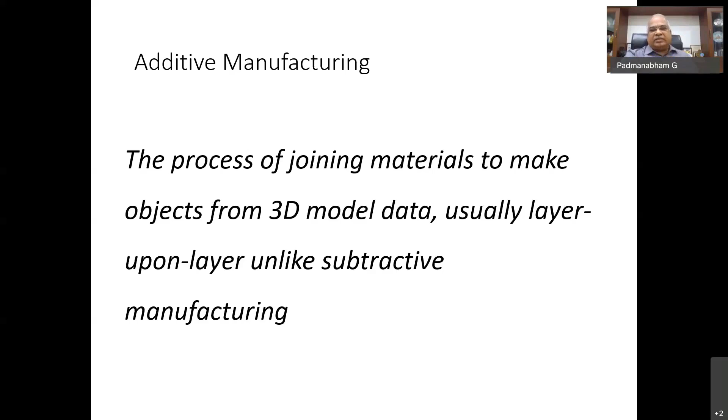So it's the process of joining materials to make objects from 3D model data, usually layer upon layer, unlike subtractive manufacturing. This is the basic definition of additive manufacturing. For any component, you develop a 3D model, slice that geometry into layers, and build each layer by running a heat source or a binder to form the geometry of that particular layer. Each layer is built over the other to get the part. This is the simple principle, which is better appreciated when I show you a video.

Additive manufacturing, why is it so attractive? It generates the product with less waste, less weight, and automatically minimum environmental impact. It is also known as 3D printing, and throughout the talk I will interchangeably use the words additive manufacturing and 3D printing. It's also called solid freeform fabrication, layered manufacturing, or digital manufacturing. It provides an immediate link between what we have created on a computer virtually and the physical object that we build using this technology.

Here is a small video of a very important component we have developed at ARCI. It's called a valve block, and it has multiple inlets and multiple outlets. It has gone through the whole process of design for additive manufacturing, topology optimization, process and support structure design, and the actual building of the component. So all these steps involved in this technique to get an actual usable component, we tried to cover. Instead of me giving an oral explanation, please have a look at this video.

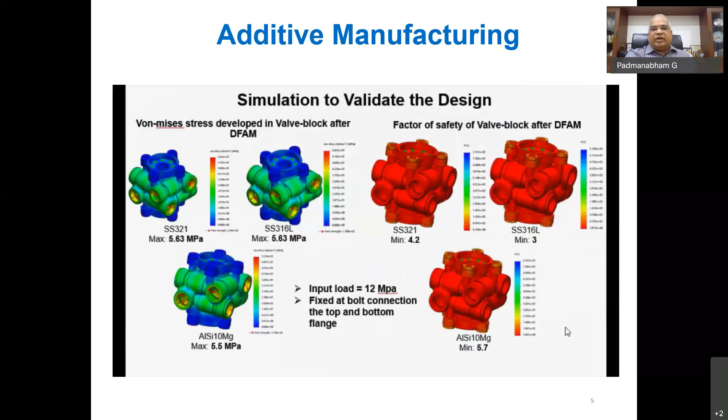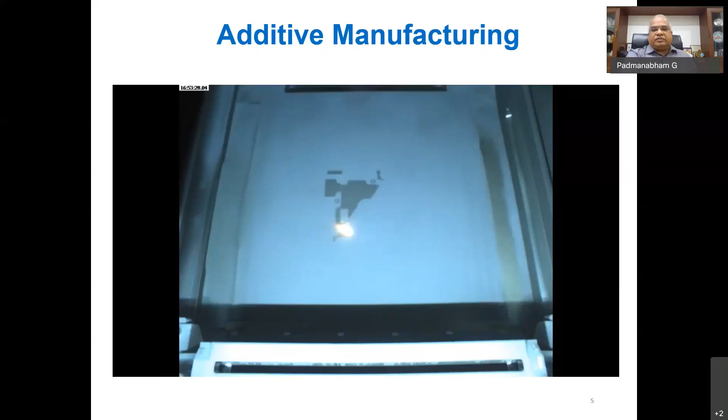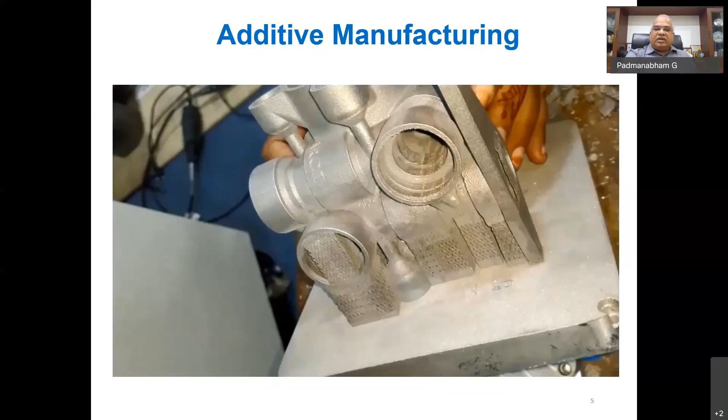After the build is over, using the powder bed technique, the part is taken out from the powder bed, and then all the support structures have to be removed.

What we are trying to show here is how you have to design your support structures so that they are easily removable.

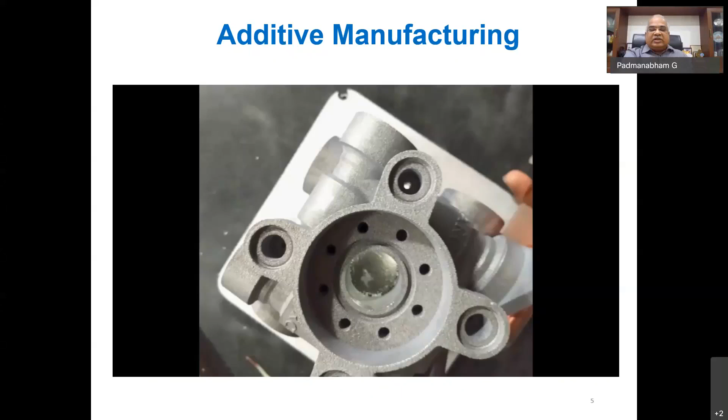So that's the finished part. You can imagine the kind of complex geometry this particular component has got, and how easily we could design as well as do a weight reduction and develop a component in probably one or two iterations itself.

A little historical background: starting from the first plastic-based rapid prototyping machine in '88, and then the first metal AM machine in 1993. Aerospace industry is considered an incubator for additive manufacturing technology due to the ability of direct metal fabrication of titanium components.

Titanium is an expensive material. Subtractively, you will lose a lot of material. So it became a good candidate sector for AM.

Similarly, in the biomedical industry, we need patient-to-patient variation in sizes and geometries of implants and devices, so customization is possible using additive manufacturing. Even for tissue growth and biocompatibility, the porosity required in the part can be tailored, and the surface behavior can be tailored so that there is better osseointegration. That's the reason biomedical industry is one major gainer from using additive manufacturing.

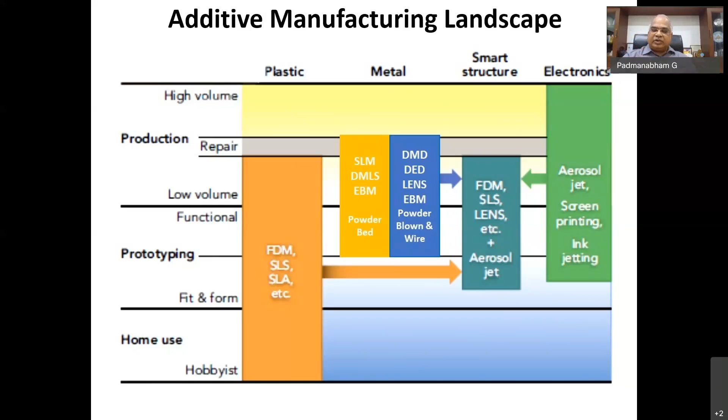So today the landscape is quite wide in terms of the materials that can be handled, the size of production that can be handled, and a large number of processes available to cover both verticals and horizontals, as shown in this chart.

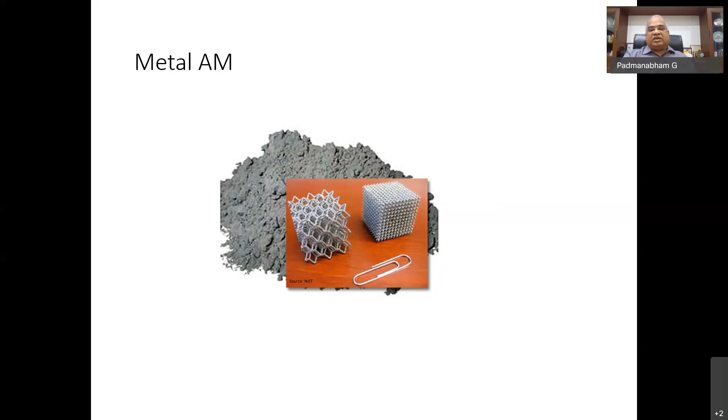And as small as a pin, what I've shown here using metal powders, you can create such very intricate geometries - you can call them mesoporous structures. That is the range that is possible.

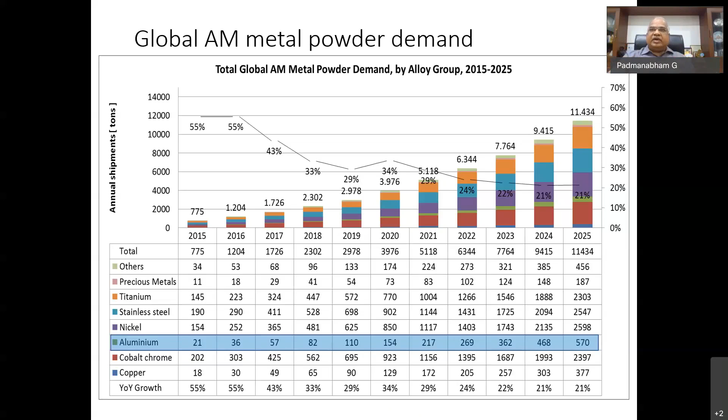So AM is here as a very hot additive manufacturing technology, advanced manufacturing technology. And the whole community of additive manufacturing, or advanced manufacturing, has a very fertile field for research as well as technology development.

Now, a little bit of dissection in terms of where all this potential is coming from. What are the fundamental reasons why this kind of trend we are seeing in the growth of additive manufacturing?

So I'll start from the top: direct translation of design to component. Then customization with no additional tooling. What we cannot subtractively manufacture, some of the complex internal features, we can do with additive manufacturing.

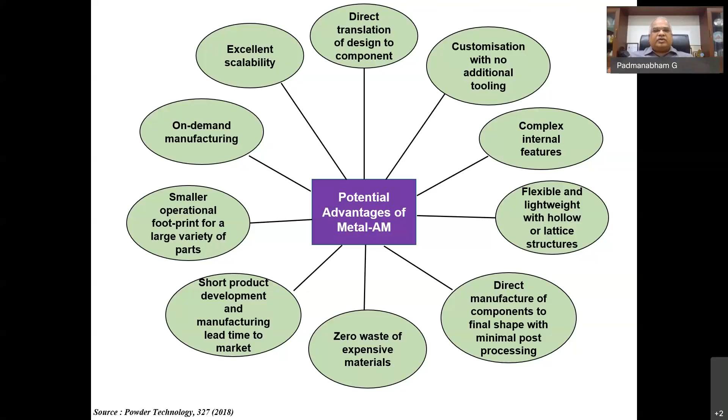So people are making big laser-assisted additive manufacturing systems, like one machine incorporating multiple lasers and building very fast, or combining laser based deposition with other hybrid methods, like very high deposition methods combined with features being deposited by laser. So there are several variants coming up, and even the scalability issues are being addressed now.

Now, having talked in general about the advantages of additive manufacturing as an advanced manufacturing tool, why has the aerospace sector imbibed it or implemented it in a big way? What are those advantages? Like we all know, in aerospace, lightweighting is important. So it is possible with AM.

And we also have to incorporate several components and subsystems in limited space, so since it gives us geometrical freedom, that's where we can draw the advantage from AM. And similarly, you can avoid welded joints and such things and consolidate a number of components into one single assembly. For example, that video I showed you is actually a combination of 6 inlet outlet valves - instead of assembling into one block, it has now been built as a single block. The moment you have no assembly requirements or weld joint requirements, the confidence of designers is higher to take that part.

And then the next part is reduced development time. So, and then this is the market size now.

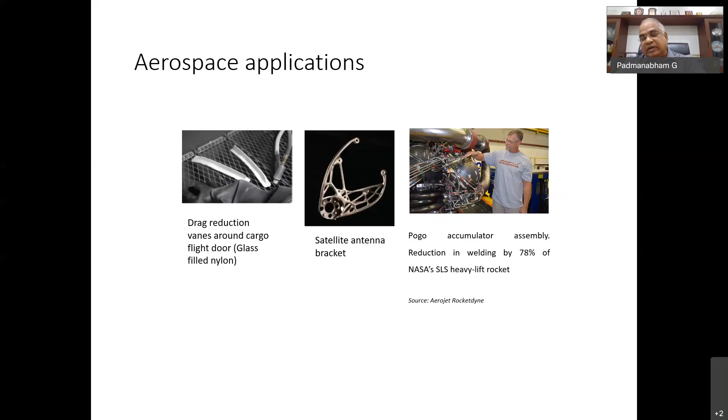In the latest GE engine, it's a demonstrator at this stage, 855 subtractive manufactured parts were reduced to 12 additive parts, reducing the part count. This helps a lot in productivity, and not only productivity, but it showed that a 5% weight reduction is possible, which leads to reduced fuel consumption.

Again, another example of weight reduction - what you make conventionally versus what you can make using additive manufacturing. This structural component uses plasma deposition technology. Even though it's a coarse deposition technology using wire as feedstock and a plasma torch as heat source, productivity has been improved substantially. You almost build a near-net-shape component 50 to 100 times faster than powder bed techniques, but 25% lighter than a forged part.

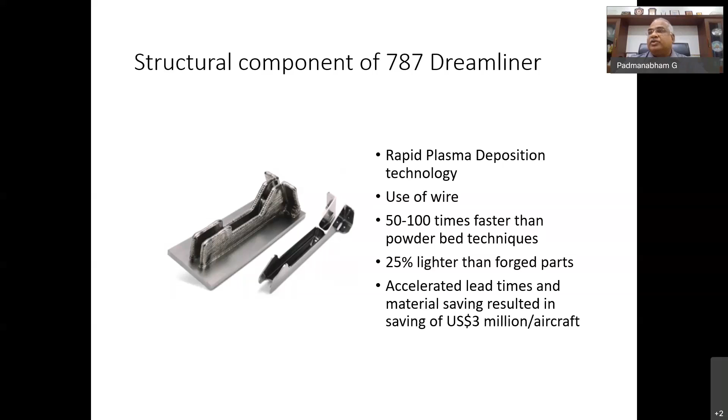Why is it attractive in the biomedical industry? I've mentioned a couple of advantages already - from the geometry point of view, the osteo-integration point of view, and the customization point of view. From the material point of view, some popular materials used in the biomedical industry are cobalt-chrome-moly alloys. With additive manufacturing, it was found that you can achieve 99.9% density and low metal elution compared to as-cast alloys, and it's cheaper also. Low metal elution means less toxicity in the body too.

Similarly, stainless steel 316L is a very popular material. High solidification rates result in avoiding manganese sulfide formation, which otherwise results in chromium depletion and pitting corrosion in these parts - this is avoided when you do additive manufacturing using a laser-based powder bed technique.

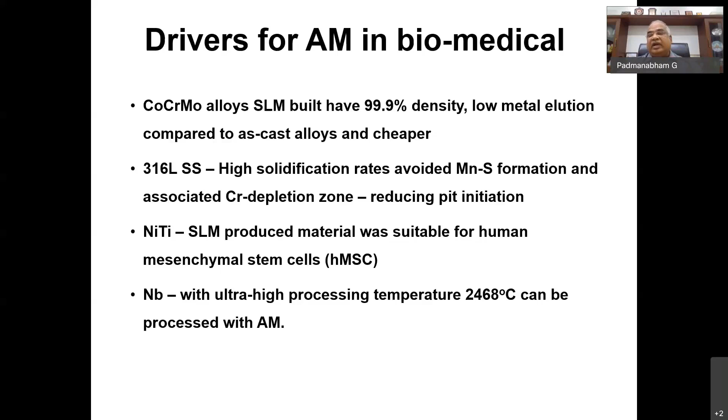And niobium alloys, which are also used, require very high temperatures of processing, which is achievable by additive manufacturing. So these are some of the very popular additively manufactured components and applications in the biomedical industry.

The lower jaw, the lumbar vertebrae, the tubular femoral bone, then the fronto-parietal temporal bone - like this, there are several components already being used in a very customized manner for different patients.

Now the next sector is the automotive sector. The automotive sector, as we know, is a very conservative sector when it comes to incorporating any new manufacturing technology, because the industry is very competitive and the profit margins are very low. So unless it is totally proven in terms of techno-economics, they will not take up any new innovation easily.

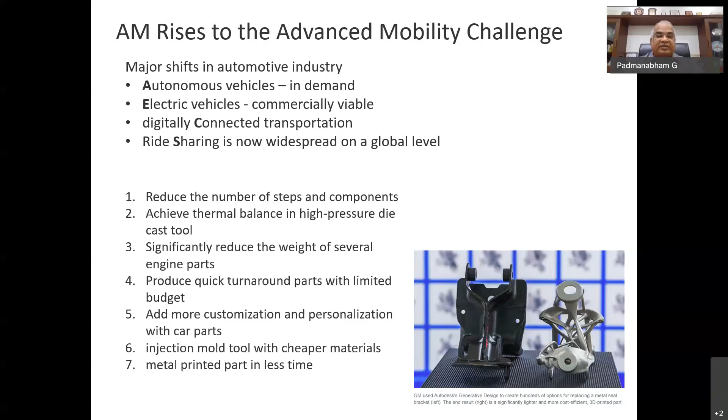So today we can't boast of a big penetration of additive manufacturing into the automotive industry, but it is happening. For example, developments like autonomous vehicles, electric vehicles, and digitally connected transportation are all leading to a need for advanced technologies, and they want to reduce the number of steps and components in manufacturing. Thermal balance, which I mentioned earlier in production techniques like pressure die casting, reduction in weight as in aerospace - here too they need light-weighting, quick turnaround of part development, and customization and personalization. These are all new needs emerging in the automotive sector, leading this industry to look at AM as a possible good technique for them.

But I mentioned that the absorption is not that fast. There are technical reasons as well as business reasons why this is not happening.

For example, the size of the parts that you are able to build as of now is not very big in the case of additive manufacturing. Combination of materials building is still a research stage area. And the major problem is qualification and certification. We don't have established standards that say an AM built part of X material...

...these are the properties that are achievable or to be achieved, then only we can accept it and incorporate it into our design. This kind of standards are still evolving, because the automotive industry produces things in large numbers with Six Sigma kind of quality requirements. Unless the process and technology is robust, they cannot incorporate it.

Similarly, on the business side, you don't have many people with the skills to operate AM technology. Then there are issues of IP protection. Even today it is highly capital intensive. Maybe in future they become cheaper - I'll come to that data also. And today the return on investment doesn't seem very attractive. The technology is evolving so fast that the machine you think is best today may become obsolete in 6 months to a year. And the industry cannot keep revamping their whole production line.

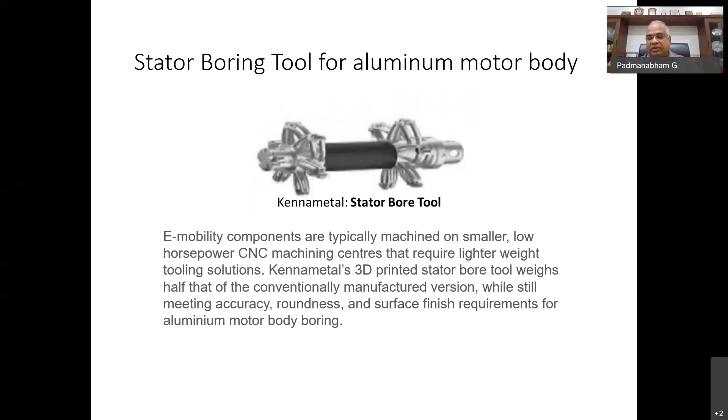For example, I told about tooling - a stator boring tool for an aluminum motor body. This is a Kennametal developed tool, used in e-mobility components that are typically machined on smaller HP CNC centers. By additive manufacturing, this boring tool could be made very lightweighted, because of which very quick adoption of simple machining CNC systems could be done. Meeting the accuracy, roundness, all those things could be managed because the tool is good. And very simple machines were able to manufacture the components.

Now, having talked about the various sectors, the various advantages, the potential, the trends of additive manufacturing, let us get a little technical now in metal additive manufacturing today. What are the different technologies available in the market? What you see here is blue boxes and gray boxes at the bottom. The blue boxes are the actual techniques, and the gray boxes are the companies which produce these machines globally. This is not comprehensive - every day new companies are getting added to this list, almost on a daily basis.

So we have the major categorization in terms of powder bed fusion, or sintering or binding method, as the first vertical, and direct metal deposition as the second vertical. Then the solid state methods of ultrasonic additive manufacturing, liquid metal printing, cold spray deposition are the other three verticals. It is difficult to get into all these methodologies and explain in a one hour talk. Possibly during the 1 week FDP program, you'll be hearing talks on each of these techniques from different expert speakers in the next 1 week. What I will cover today is some popular techniques which we also at ARCI have hands-on experience with.

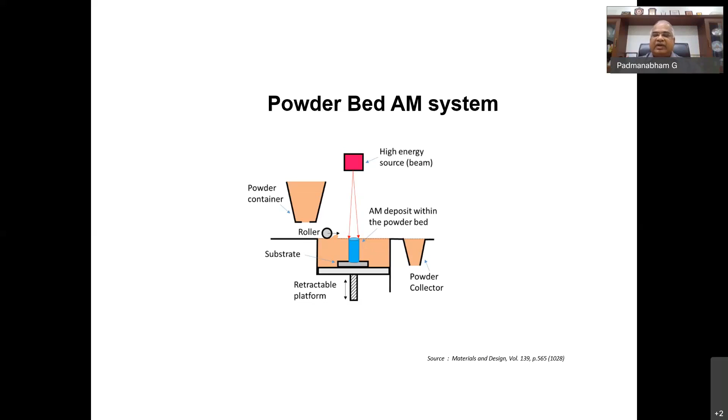So I will talk of the powder bed AM system. You have a bed of powder on which a laser beam or an electron beam, as heat source, is scanned in the pattern that you program. Wherever the laser beam scans the bed, that portion gets melted and solidified. After that layer, you lower the platform or the bed by about 50 to 60 microns, spread another layer of powder, again scan the laser beam, melt and solidify. Like this, the process continues layer after layer, and at the end you have the part you are looking for. This is called the powder bed additive manufacturing technique.

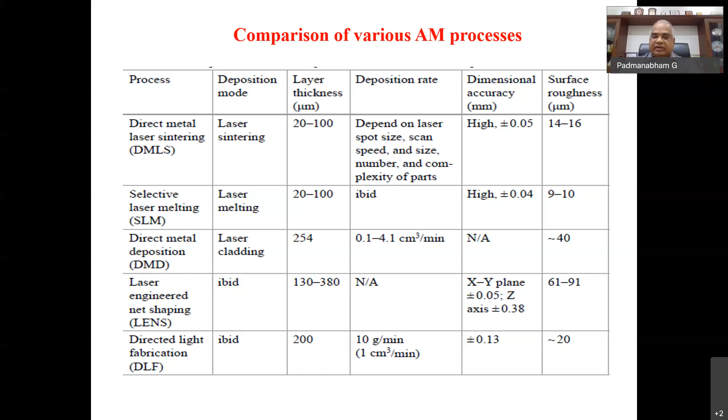Then you have electron beam as a heat source. How is it different from laser beam as a heat source? Today we have machines which can give up to 6 kilowatts of energy. The beam scanning is not done with optical scanners as in the case of laser, but with magnetic systems, giving extremely fast beam translation without any moving parts. So you can imagine the robustness of the machine and the zero maintenance requirements of the scanning systems.

The processing is done in vacuum, because unless it is vacuum, the electron beams get scattered or diverged. The bed that you are melting using the electron beam is also kept at a higher temperature, for better coupling of the beam. The electron beam is first scanned on the bed to form a cake, and then the melting scan happens. Because of this, the bed is maintained at 650 degrees centigrade, and once you have a higher bed temperature, the thermal gradients that the melting and solidification layer experiences will be less, resulting in less residual stresses.

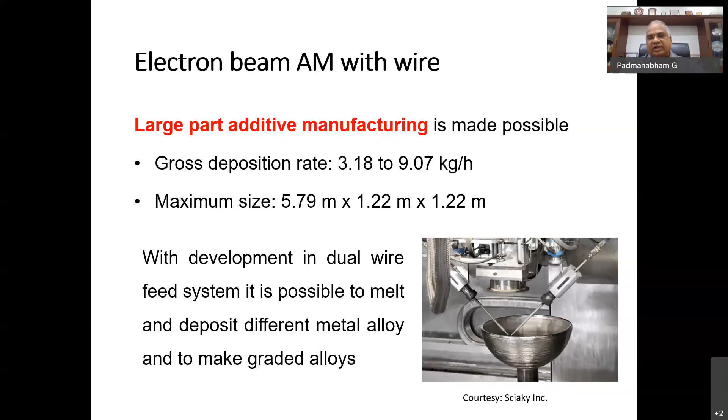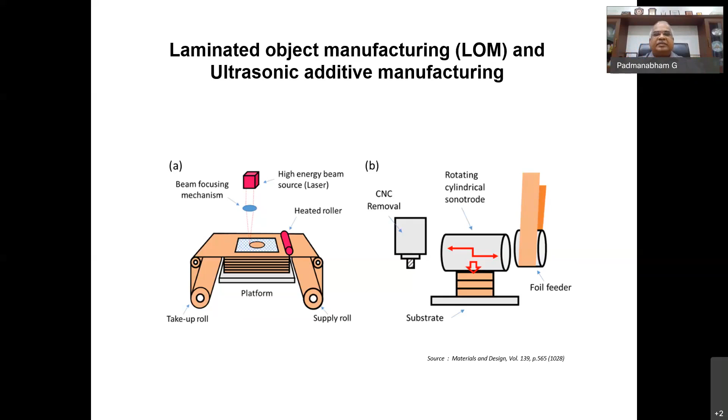There is also another method where you don't use a heat source, but ultrasonic energy. A heat source you can use, and even ultrasonic sources you can use, where the feedstock is neither powder nor wire, it is a foil. Foil after foil you place instead of building the layer, and those layers are fused to one another to build the component. So it is a kind of solid state method, where you are applying force to join one layer to the layer below.

The next technique does not use a heat source; we don't melt and solidify the material. Here we use certain binders to form the shapes. The technique of having a bed and lowering it layer after layer is constant, but in a given layer, the shape is formed by jetting certain binder, which solidifies, dries up, and gives you a green shape, and then eventually the component. This we have to keep in mind.

Now, if we consolidate these three methods for additive manufacturing and compare them with technologies we are already familiar with in manufacturing: laser additive manufacturing, electron beam AM, or welding arc additive manufacturing, making layer by layer through melting and solidification, is similar to multi-pass welding. The ultrasonic method I mentioned is similar to solid state welding, involving high strain rate thermomechanical deformation. And the binder jetting method, where we make a green component using a binder and then debind it and sinter it to get the component, is similar to what we do in powder metallurgy.

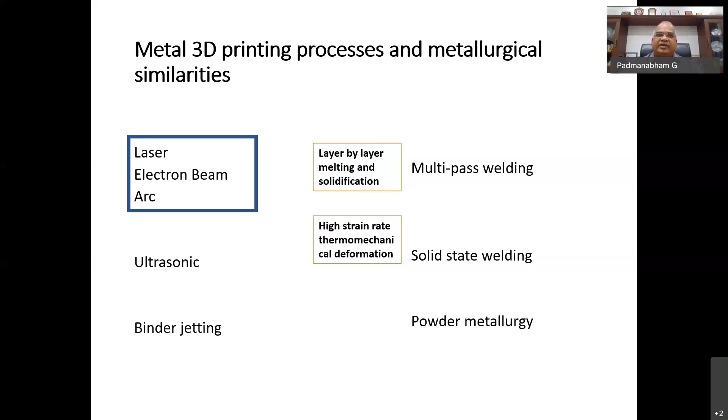So you can imagine the kind of potential for defect creation. We have to be very, very carefully designing the process. That's what I have tried to talk here. The process design and parameters choice is very, very important to get quality products.

Here on the left side, you can see the comparison of laser powder bed technique, laser powder feed technique, and binder jet technique. There are several input parameters, understanding of the process physics, and the output, depending on your geometry, what microstructure you are leading to, what cracks may come, defects like porosity, stresses, roughness, dilution. All these are the output that you end up with, dependent on the physics and the input parameters.

So when I consider the input parameters, it can be material properties, powder properties, the simple feedstock properties. When you compare laser powder bed versus laser powder feed, the powder feed rate is the additional parameter in addition to the laser properties. Then the type of motion device or motion table that you have will also decide the accuracy you will get. So this gives you an idea of the overall landscape of process challenges one comes across in understanding the process of additive manufacturing.

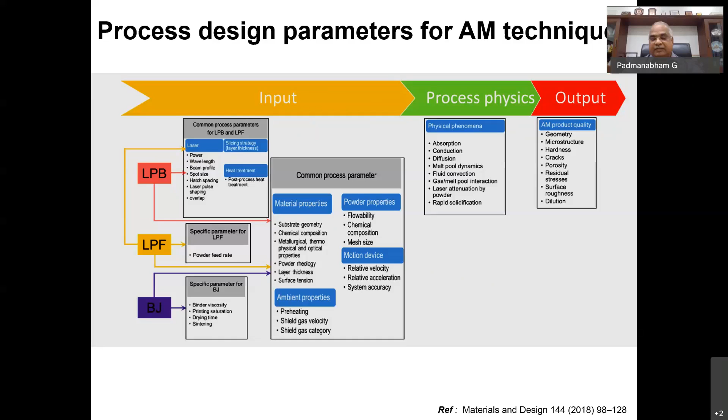I'll give you a couple of examples of how it affects things. The first one is the case of material itself. Why is it so critical? In both powder bed, where we are spreading the layer of powders, or blowing the powders in direct energy deposition, the flowability of the powder is very important.

So the first parameter comes from the morphology of the powders. We need spherical powders. And when we have melted and solidified, what we are looking for is 100% density in the part. So for that, you need the right combination of bimodal distribution of these spherical particles.

And then the powders are produced and supplied by different suppliers from all around the world. We found that there may be a variation in the process behavior from supplier to supplier also. We have seen that, so this is another challenge.

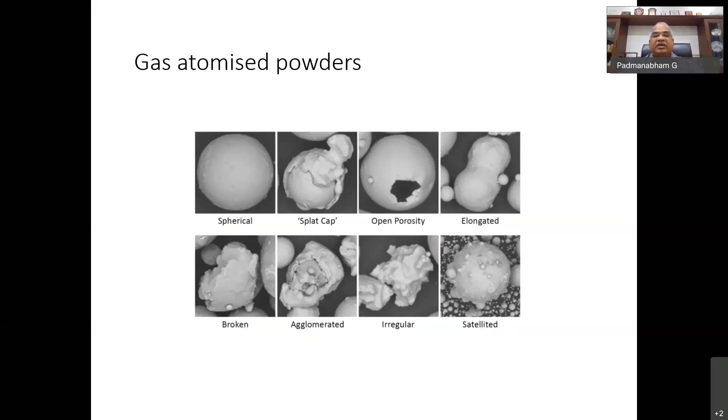And within the powders, what should be the quality of the powder? These are all the defects that we encounter when you look at the powders, like open porosity, the satellites of small powder particles on the bigger particle. With open porosity particles, you end up with porosity in your part. When you use satellited particles, you end up with higher surface roughness, difficult to manage your surface finish. And even after having good quality powders, when you do multiple melting and solidifications, you can end up with porosities at the interface of various processes.

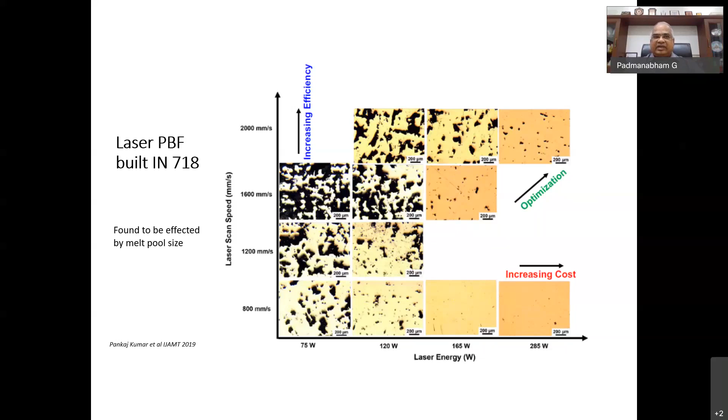What you see here is the amount of laser energy you are putting into melting, and the speed at which you are scanning the surface. If you plot these on the y and x axis like this, you see that if you put as much energy as possible, you will nicely fuse it, but you have to go very slow, and that results in low efficiency. But if you want to increase efficiency and scan very fast, the quality of the material, in terms of getting the density you're looking for and minimal porosity, will be changing. So there is a clear optimization need in terms of speed versus energy to have a feasible, acceptable efficiency as well as quality of the build.

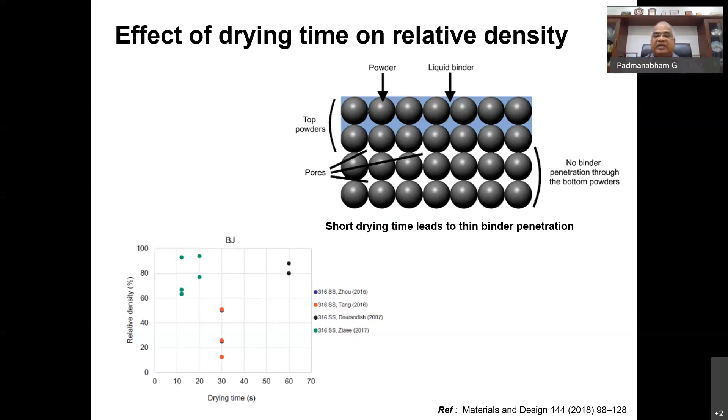This is another optimization process related R&D that you can do. Even in the case of simple binder jetting method, the choice of your binder matters - if the drying time is too less, then the penetration into the bottom layers will get restricted and you end up with poor quality of your green compact. So you have key stages of quality check in additive manufacturing, right from the raw material quality to the process, as well as the final part itself has to be checked so that it is acceptable to the user.

So ASM expanded additive manufacturing capability by adding 2 new labs for making the technology more robust. They added a powder characterization lab and a computed tomography lab to check the quality of their built parts right from the feedstock. And then even NIST of the US has created a measurement science program for additive manufacturing.

What they are doing there is characterization of the AM materials, real-time control of AM processes like in situ sensing and monitoring and feedback control, then qualification of AM materials, processes and parts. We know we have standards and guidelines and codes for welded parts, forged parts, cast parts. Similar codes are to be made available for AM parts.

And then even system integration to make the process robust. For example, there are 2 systems in the market already by 2 companies, Renishaw and 3D Systems. So we talked about the importance of laser energy that has to be put for getting the right kind of melt pool size so that the defects are less.

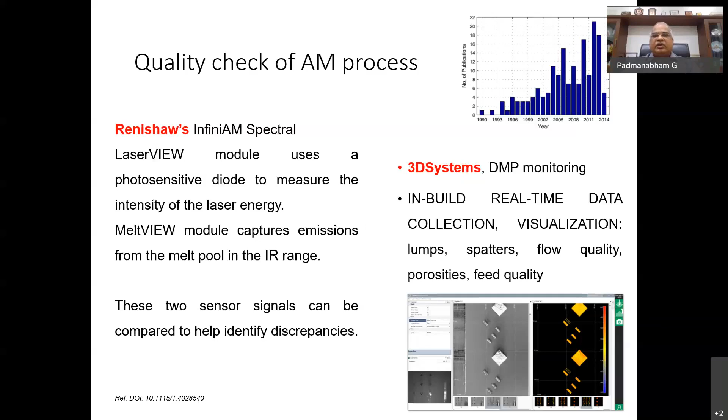So if you combine all this in terms of what are the key technical challenges one has to keep in mind - we want defect-free builds, we want to maintain dimensional accuracy. Material is very expensive, so we should be able to reuse the material. Then the properties in all directions should be similar.

Otherwise, designers have some doubts in their mind about what properties they should use while designing, because the microstructure that you end up with when you melt and solidify varies with the kind of thermal history that a particular location undergoes. For example, when you build layer by layer, the XY plane properties and the Z properties can be different. So that isotropy is inherently disturbed by the nature of the process itself. We have to have methods for getting isotropic properties.

And then when you do building of the components, you have complicated geometries. The stress patterns are different depending on the geometry, and they can lead to deformations. And then we talked about build size limitations, and also qualification and certification of structural parts. So those of you who are academics, when you take up a research problem, these are the areas in which you can look for launching a research problem and research work.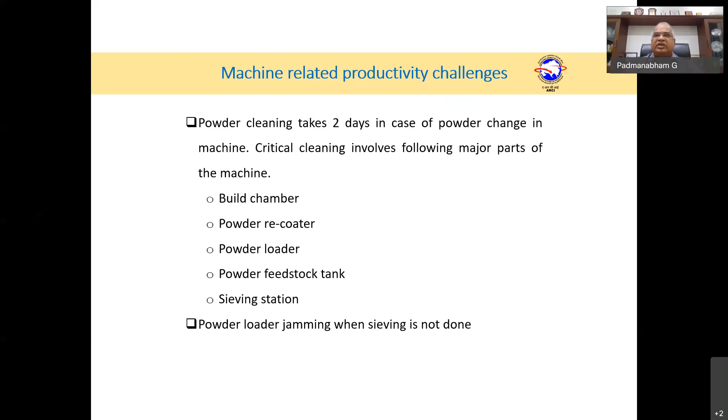So it is very tricky to see that it is thoroughly cleaned before you switch from one to the other, and then there's powder loader jamming. These are some practical problems which we are working on along with the machine supplier so that the next versions of the machine can solve these problems.

The other problem is the size limitation we talked about. Why is it that today a powder bed AM system with 2 into 1000 watts laser is available, or 4 into 400 watts laser is available, and still they are only able to cover a bed size of about 500mm, half a meter by 280 by 325.

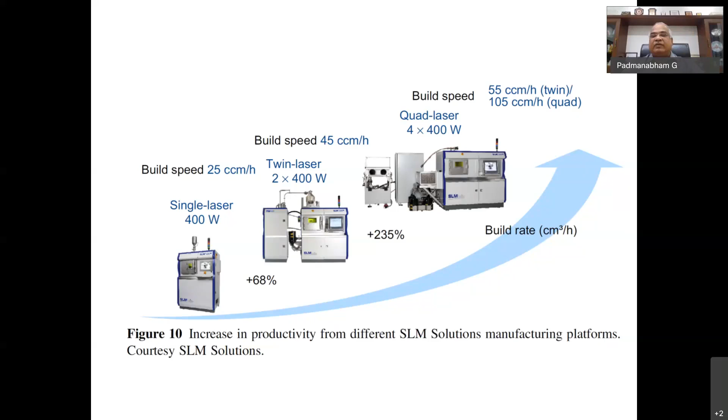Still, those limitations are being worked on. Take the case of SLM, who is our partner in setting up our center here at ARCI. You can see the trajectory in the direction in which machine development is going in terms of productivity, going from a 400 watts laser to 2 into 400 watts, resulting in 68% increase in productivity, and then 4 into 400 watts, and so on. So this is the trajectory with which machine developments are happening.

I also mentioned the constraints from an economic point of view in the case of absorption of additive technology. Today, predominantly the powders that we are asked to use are proprietary to the machine suppliers because of various challenges I have mentioned. Supplier to supplier, the behavior of the machine as well as the metallurgy you end up with changes, because of which machine suppliers also quote very big prices, $100 to $400 per kilogram.

This depends on whether it is aluminum alloy or titanium alloy. The machine costs are also very capital intensive, $0.5 million to $2 million. The production rate and productivity is also not very high, about 2 tons per year, and the machine hourly rate is about $50 US. So all these costs, when amortized over the number of units produced, hover around hundreds of dollars per kilogram, whereas tens of dollars is what current conventional manufacturing processes can deliver.

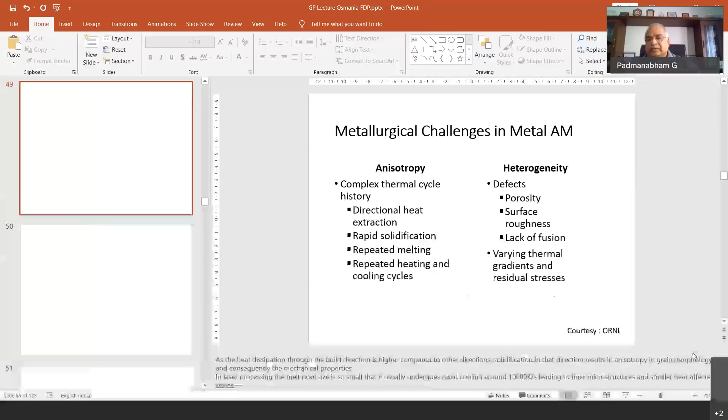The layers you have built in the past, as you are building the Z planes, those bottom layers are experiencing repeated heating and cooling cycles. Different zones experience different gradients and solidification rates, and the solidification morphology changes, sometimes from cellular to dendritic to equiaxed grains. All that will reflect in the mechanical properties and the other heterogeneities that we create.

We talk of welding also - all the research is about making materials as homogeneous as possible so that the properties are predictable. That includes lack of fusion, surface finish, and varying thermal gradients resulting in residual stress. So these are the challenges that we encounter while doing metal additive manufacturing.

Now, all that metallurgy I mentioned, like rapid solidification, defect formation, and fusion behavior, changes again with material to material. So there are some commonly used alloys, which I call AM-friendly materials, and then materials which are still challenging for additive manufacturing. A lot of research is going on to bring these challenging materials into the ambit of additive manufacturing. I'll give you some examples of why some are friendly, why challenges exist, and why some still need to be researched.

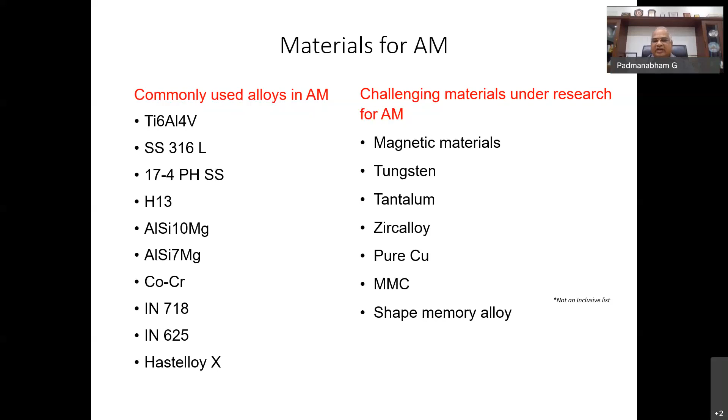Let us take the ferrous materials. As it stands today, here is the list of steels used: Maraging steels, Mart 420 grade, 17-4 PH steels, 304 and 316 stainless steels, tool steels, H13 tool steel, low alloy steels, and pure iron is also used for additive manufacturing today. Predominantly, the laser powder bed technique is used, with only a little electron beam, because in steel oxidation is not an issue, so electron beam is an overkill for additive manufacturing of ferrous materials. Laser powder fusion methods are also used substantially.

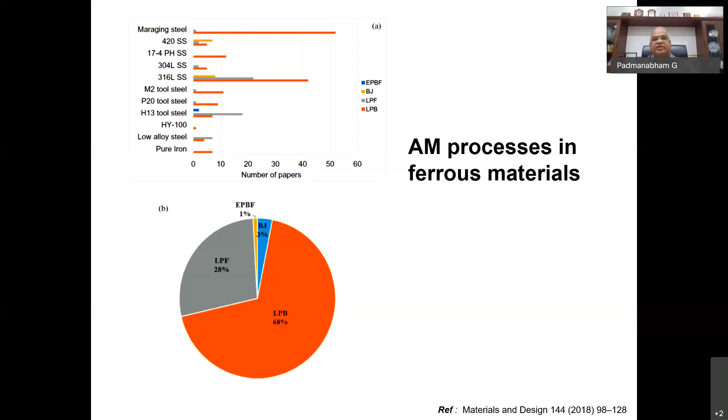Within that, if you see the bar chart of number of research papers, Maraging steel has the highest number of publications, followed by stainless steel - these are all well-studied materials, and a lot of applications are also there. The reason is, take the case of 316L: it's an austenitic stainless steel, a single phase material, single austenite phase, and density achievable is almost theoretical, 7.94 versus 8 grams per cc.

When you look at the microstructure of this AM built layers, you can see in the left top microstructure each of those melt pool boundaries and the layers - a typical microstructure.

Can you just give me a second? Just give me a second. Please, sir, please.

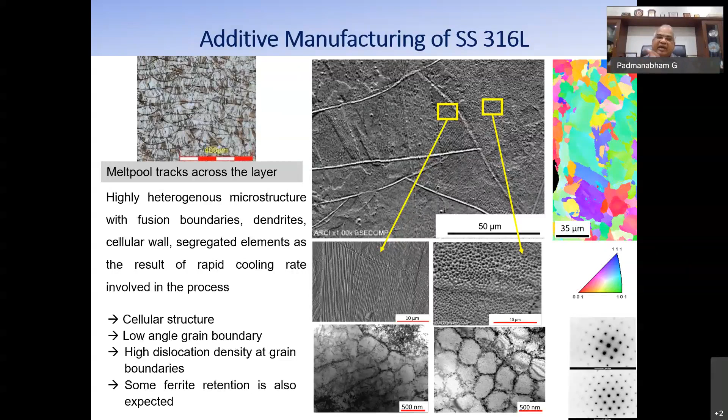So we can see effects of rapid solidification in terms of a cellular microstructure, very low angle grain boundaries. You can also see high dislocation densities at grain boundaries with some ferrite retention, which gives you ductility also. These are the typical features we encounter in an AM built stainless steel, even if it's a single phase material. This shows up as yield strength going from a conventional property of 170 megapascals to 441 or 399 in the two directions of samples taken from an AM built structure.

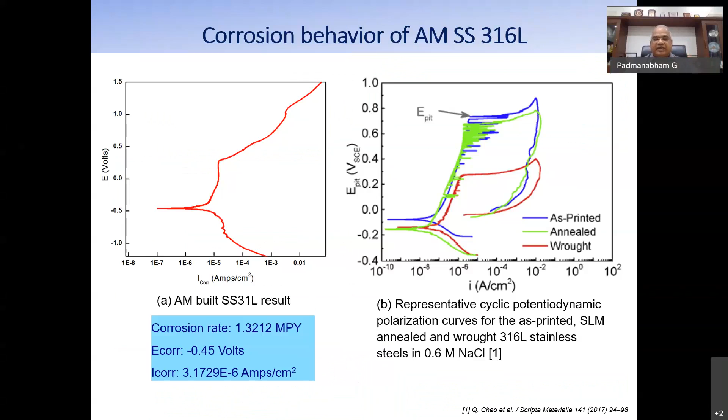This is typically coming from the microstructure I've explained. But stainless steels are mainly meant for high corrosion resistance, especially pitting corrosion resistance. You can see from the potentiodynamic polarization curves that the AM built SS316L is superior to the wrought 316L - you can see the corrosion rate. Even the corrosion voltage shows it is superior. Why this is happening: if you take element mapping across, the usual conclusion is that manganese sulfide formation is suppressed, because of which chromium depletion is also suppressed, resulting in better pitting corrosion resistance in this material.

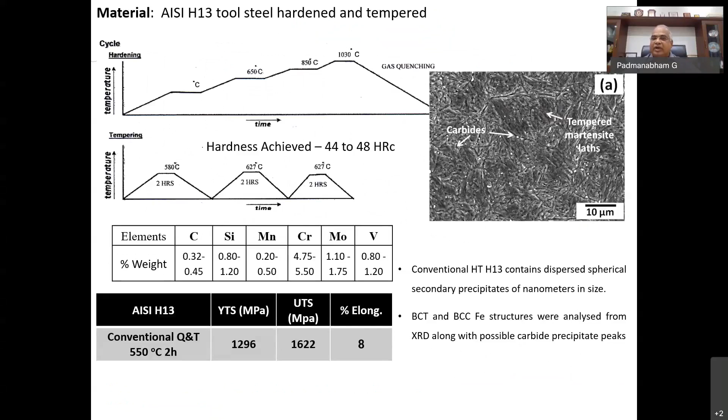Take the other materials, like die materials, Maraging steels or hot work tool steels like H13. Here you want high temperature properties, and normally to achieve these properties you have elaborate heat treatment cycles that look for very fine distribution of hard carbides, which do not coarsen but give you high temperature properties in the conventional method.

You can hear? Professor Ramakrishna, can you hear? Yeah, I'm here sir, I'm able to hear, sir. You are able to hear, right? I'm able to hear, sir.

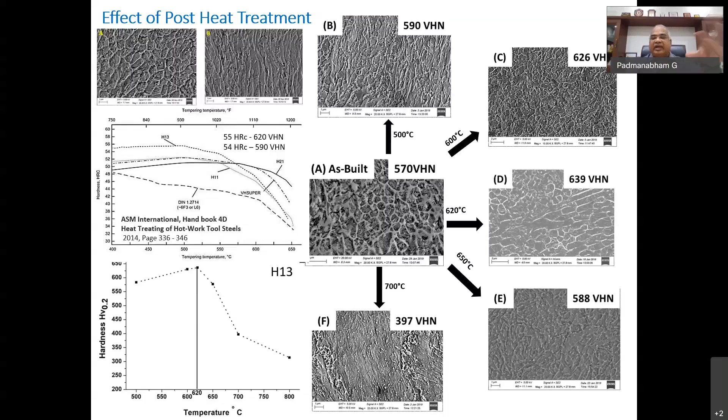We are able to achieve - just build a tool or the part and give a 620 degrees centigrade treatment - and then you have broken the cast structure and also retained the carbides required in the grains as well as at the grain boundaries, giving you the high temperature properties.

A very detailed metallurgical analysis of phase analysis, using X-ray residual stress measurement methods, calculated the crystallite sizes and microstrains. Using these values and the equation shown at the bottom, we calculated theoretically how much dislocation density is present in different heat treated conditions.

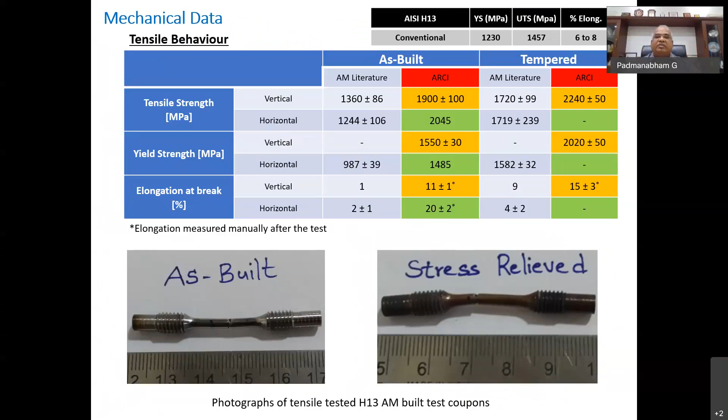You can clearly see that AM H13 has got the highest dislocation density, which impedes the motion of dislocations, giving the higher properties that you're looking for. So AM is a beneficial process for this kind of steel, and that is clearly reflected in the properties you're getting from AM-built H13 tool steels.

That is coming from refined sub-nano size carbide precipitates within and around bundles of martensite, and chrome, moly and tungsten get enriched in the alpha phase to form BCT martensite. All this is due to high cooling rates encountered in the SLM process. Advantages are simple heat treatment, and once you use AM, you can build conformal cooling channels. Good hot hardness implies better tool life, so this is a good AM-friendly material.

Let us look at non-ferrous materials. When we handle aluminum, we have defects caused by thin oxide films, and focus should be on avoiding formation of oxide films or disrupting them through Marangoni effects. High volumetric contraction and thermal expansion leads to other issues like stresses, etc.

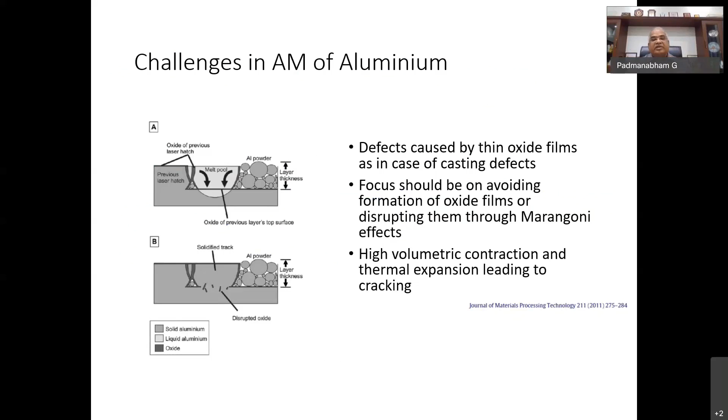We have done a lot of experimentation of AM of this alloy, and you can see the properties. I'll just concentrate on that part. The last row, ASM, is the standard properties we have here in terms of yield strength, ultimate strength, as well as elongation. All the properties have improved in the case of additive manufacturing.

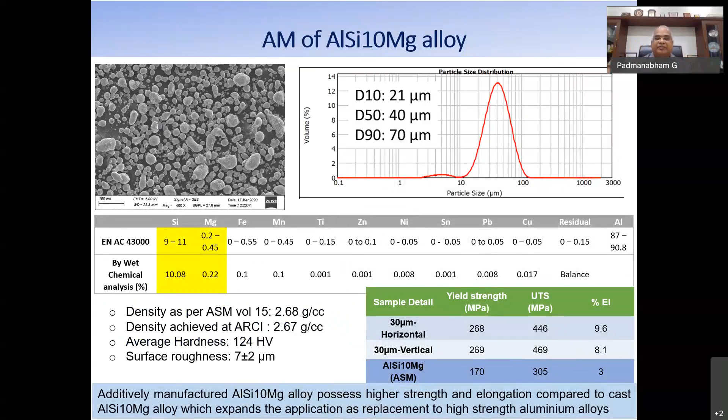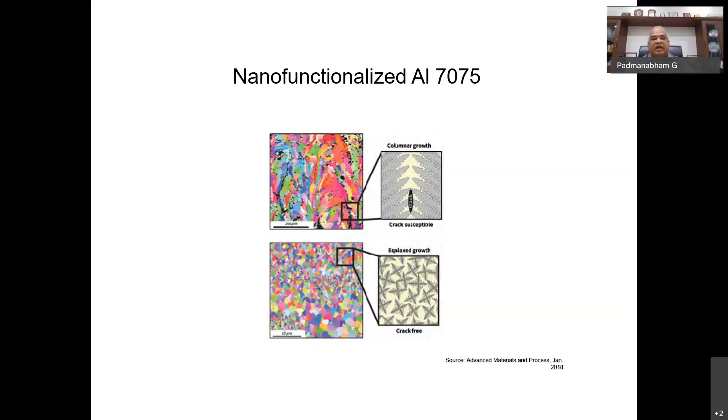There is also an innovative possibility of avoiding the solidification problem by nano-functionalization, adding elements like zirconium so that heterogeneous nucleation is promoted. You can avoid the segregation pattern shown in the top picture and end up with a very fine grained structure, which helps in getting the good properties you're looking for.

Similarly, let's go on to the titanium alloys. I think we are now running a little bit short of time.

How much time do you have? Sir, still you have time. You can have another 15-20 minutes. 20 minutes, no problem. No problem, sir, you can proceed. I hope it is not an overdose. No, it's not, sir, it's very interesting. In-depth studies - most of the faculty can select research problems from these studies, it's very useful. Okay, so you can continue. I will load you with more and more. No problem, sir. Because very few people get this information outside, sir - in text, anywhere, in literature, we cannot get all this.

Yes, proceed. So the next great material is the titanium alloys. You know why they are important - the aerospace sector uses it extensively. It's a high specific strength material with good fracture toughness, high fatigue behavior, less corrosion, even biocompatibility for biomedical applications. But it's not an easy to machine material, has very low thermal conductivity and high reactivity, and that's the reason it becomes a nice candidate for additive manufacturing. Casting process is also tricky, welding is also a little tricky, so generally it's machined from forged blanks, and especially in aerospace industries there are components where 95% of material is machined off to get the final shape you're looking for. Considering the technological and metallurgical advantages, titanium became a darling material for additive manufacturing.

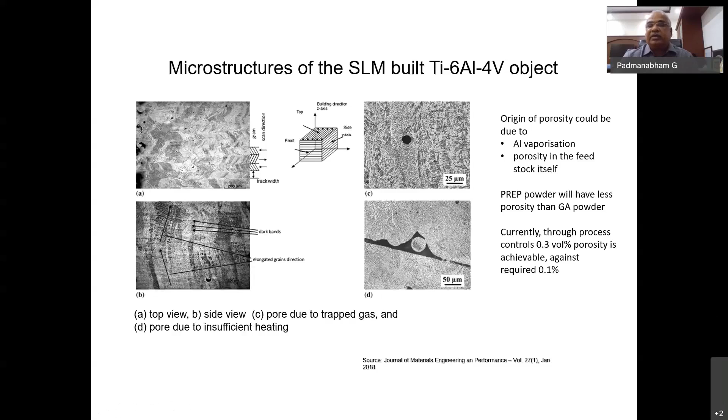So one has to be conscious that we can end up with this kind of inhomogeneity, and we should know how to deal with it through post-processing heat treatments.

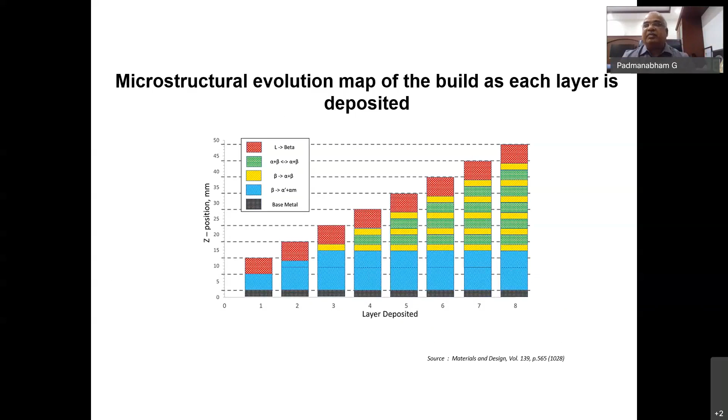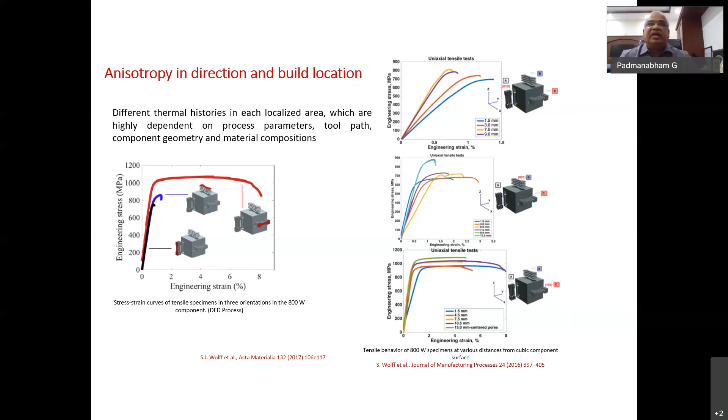In the vertical direction, you build layer by layer, and any small defect in those layers can result in delamination and failure.

But people have been able to overcome this problem by doing post-heat treatment, getting back the elongation they are looking for, using something called hot isostatic pressing.

Hot isostatic pressing applies high temperature and pressure simultaneously. Like we have a HIP at ARCI - 2000 degrees centigrade, 2000 bar pressure applied simultaneously - because of which the porosity gets closed, certain grain coarsening happens, homogenization happens, and you end up with better properties.

So when you talk of titanium 6 aluminum 4V material, we always look for a bimodal structure like globular alpha plus fine lamellar, obtained by solution treatment and aged condition. It gives the right combination of properties like specific strength, toughness, and fatigue behavior we are looking for, which is unachievable by AM, but good properties could be achieved if we can do in situ martensite decomposition to lamellar alpha beta.

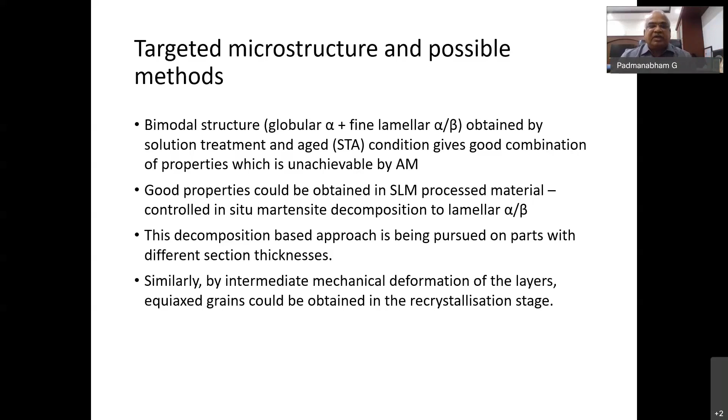This gets too much into molecular or phase level transformations - this is a subject for a 1 hour talk, so I would not like to go too much into it. By intermediate mechanical deformation also, people are able to achieve the properties they are looking for.

The next alloy, the most popular one, is the nickel-based superalloy used in blades of gas turbines, rocket engines, turbine blades. This is also a complex material. We have strengthening phases like gamma prime or gamma double prime in a gamma matrix, and the undesirable Laves phase.

So the whole solidification behavior and heat treatment behavior has to be optimized to minimize the Laves phase and maximize your gamma double prime or gamma prime phase in the material.

We did extensive work - we make this powder in our own lab, and you can see the kind of powder size distribution we achieve, compared with commercially available Inconel 718 powders. We studied the niobium segregation in this alloy, since that determines the amount of precipitation behavior in this alloy.

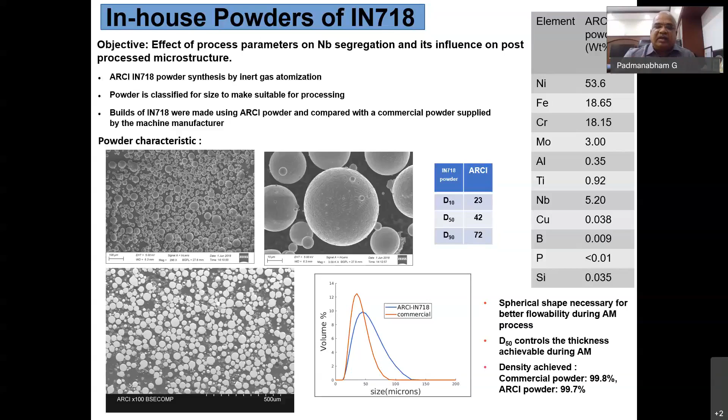So what I mean to say is we are able to make indigenous powders, and in this case the material is reasonably AM-friendly. We also saw that the wrought material and the AM-built material respond to heat treatment in a similar fashion, and the volume fraction and distribution of several phases is also the same in both cases, because of which we'll be able to predict the product properties better and implement this material into production.

Now I go to a little more challenging material - copper.

Several copper components, when you irradiate a laser beam, it reflects off. So melting copper is a real challenge. It's not easy, and that too to get your fine features because of the high heat dissipation that happens.

But today, even copper is made amenable, and a lot of tooling where thermal management is required using copper materials are being made with conformal cooling channels using copper material.

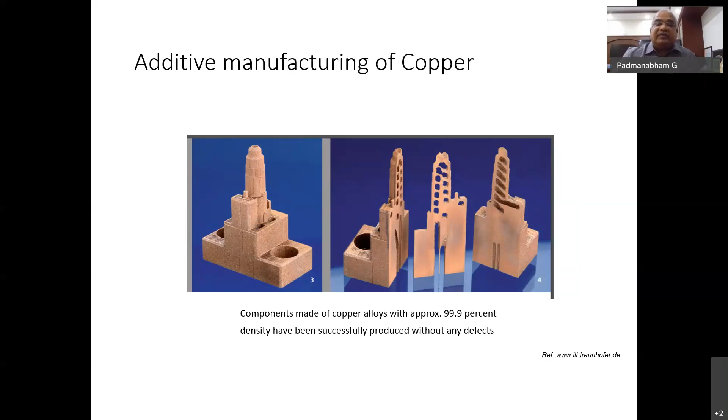In fact, Fraunhofer has published this. ILT in Aachen have done it using a green laser, a very special laser that has been built for additive manufacturing. They have even showcased induction coils made out of copper using this special green laser.

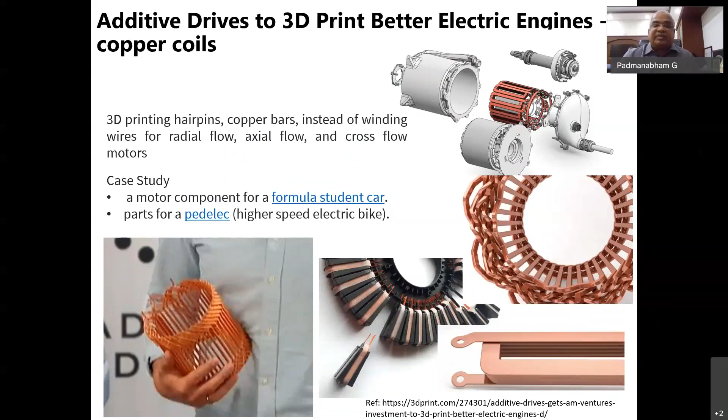We all talk about electric vehicles and electric mobility these days. Electric mobility means you need motors, stators and windings, and copper bars instead of winding wires for radial, axial, and cross flow. The hairpins, they are able to 3D print now, and you can see the parts created and assembled into a motor. Today it's going to be a reality, more or less. It's in the prototype stage, but even 3D printed motors are going to come.

Similarly, electric mobility requires magnetic materials with high BH product. Conventionally, melting, crushing, milling, magnetization for high alignment of domains, sintering, annealing, and then oxidation by plating on top - this is the several steps through which you manufacture magnets.

But when you use additive manufacturing for magnetic materials, today even the FDM method as well as the selective laser melting methods have been used to make permanent magnets. Almost 45% magnetic particles have been put into thermoplastic filament, and the FDM method is used to make the shapes of the magnets we are looking for, and then magnets are being made.

In the SLM method, the most popular NdFeB magnet with a BH max of about 45 kilojoules per meter cubed is achievable today without post-heat treatment. Similarly the Alnico type - these are the two popular magnetic materials we know. Good amount of recent work has given good promise in terms of application of AM to magnetic materials.

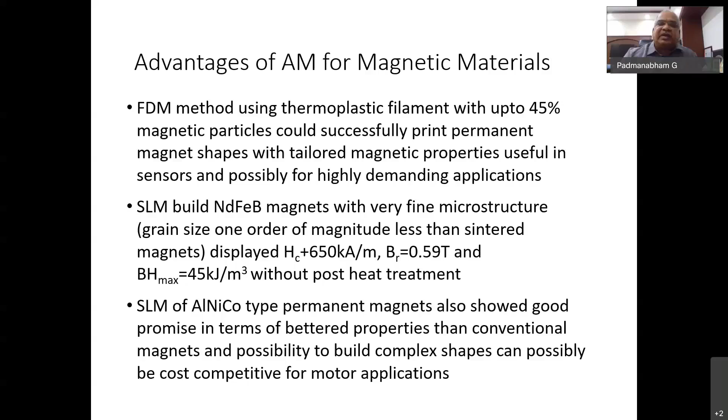Now coming to a few examples of AM at ARCI, the metal powder additive manufacturing. I have already talked quite a bit about what we have done - that is about the metallurgical part mentioned earlier. Now I'll show you some typical examples which are developed and put into use.

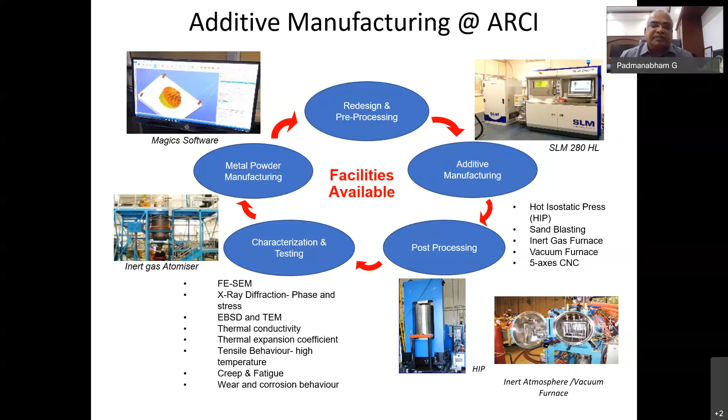Starting from metal powder manufacturing to design, to actual additive manufacturing, to post-heat treatment, to characterization and testing - the whole value chain is addressed under different groups of our lab. You can see the facilities shown here.

As far as additive manufacturing facilities are concerned, we have powder bed additive manufacturing using lasers, 2 SLM machines, and a laser direct energy deposition machine using a robotic deposition system. We also have the Arcam EB powder bed fusion technique, a laser wire deposition system, cold metal transfer for wire additive manufacturing, extrusion based ceramic 3D printing, and even cold spray coating technology which can be used for 3D printing, mainly for repair applications.

So these are all various techniques of AM that we have, and we have addressed several applications. It's a partial list - about 15 applications are listed here, starting from the valve block I've shown a video of, to a pressure die casting tool, to a nozzle guide vane, to mesoporous structures.

But whatever application you take, it starts from the choice of material and its behavior, to design for additive manufacturing, the 3D model or slicing, the topology optimization, the orientation, the building process optimization, stress relieving, post-processing, support removal, improving the surface finish through shot blasting or any other method, heat treatment, dimensional accuracy, and testing and validation. This whole value chain we have to go through before we put a technology or component into service.

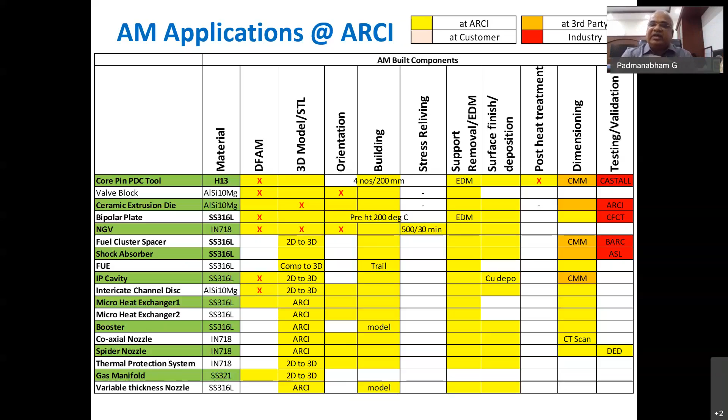In this matrix of material and application versus the various process steps involved in additive manufacturing technology, the intersection of these points, the horizontals and verticals, each of these areas are potential research areas.

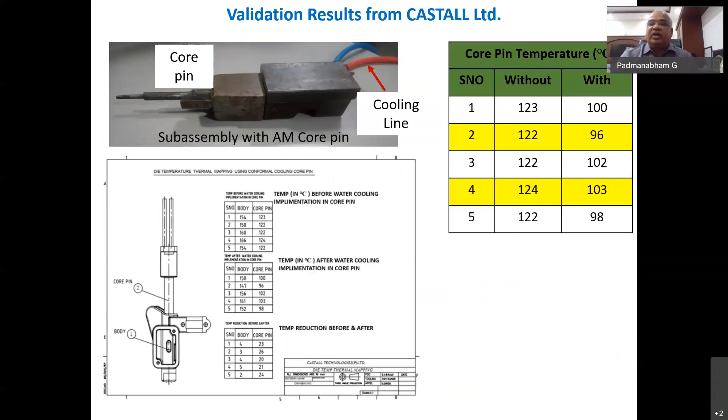One example is a pressure die casting die for conformal cooling. You can see the spiraling cooling channel and a semicircular or hemispherical top end in the picture, which gives effective cooling. We made this using additive manufacturing, and it has been put into actual pressure die casting industry use. Without the cooling channel versus with the cooling channel, the core pin temperature is less by about 20 degrees, resulting in less heat checks and porosity. Almost 30,000 shots have already been done, and the industry is happy with this.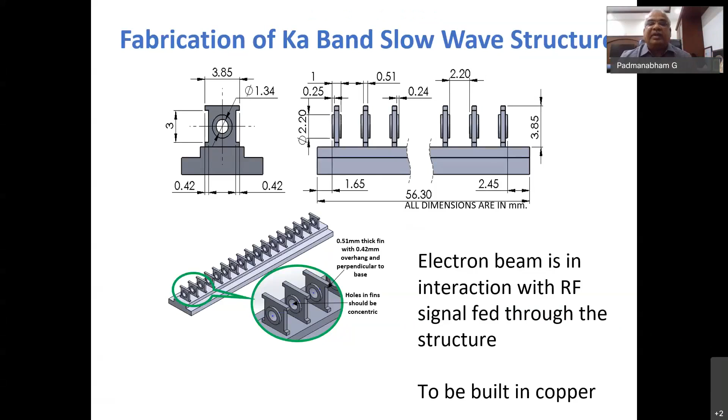Using our SLM machine, this is not possible because copper reflects all the laser radiation. So what we did was first experiment with building the features using the more friendly 316L material on a copper plate. We did all the mechanical and metallurgical interface studies and found it mechanically good. Then we took a copper block, built the steel features onto it, electropolished it, and got the component we were looking for. This is what I call hybridization of additive manufacturing methods.

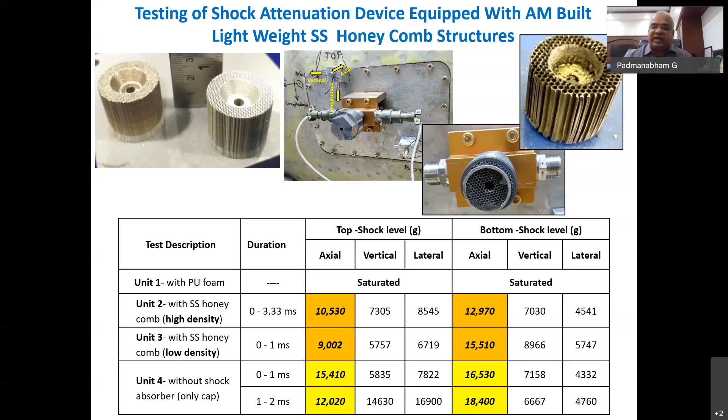Next is a honeycomb kind of structure with a porous structure and vertical channels, which has a particular shock attenuation property. This is also used in certain missile applications, so when something hits it, it should collapse and absorb the impact energy. Depending on the shape of these channels and the wall thickness, the shock attenuation capabilities change. Depending on the user requirement, these channels were designed and built, and the actual experimental results show the desired shock attenuation has been achieved.

This is a vane used in the high pressure turbine of an aircraft engine, a nickel-based superalloy product. The vane is so complicated in geometry that it is presently made using investment casting followed by laser drilling for cooling holes. On the right side is the conventionally made component, and on the left side is the AM built component. In one go, all required features, including holes, could be built with additive manufacturing. Presently we have achieved the required geometry, but a lot of other tests are to be done before it is finally accepted.

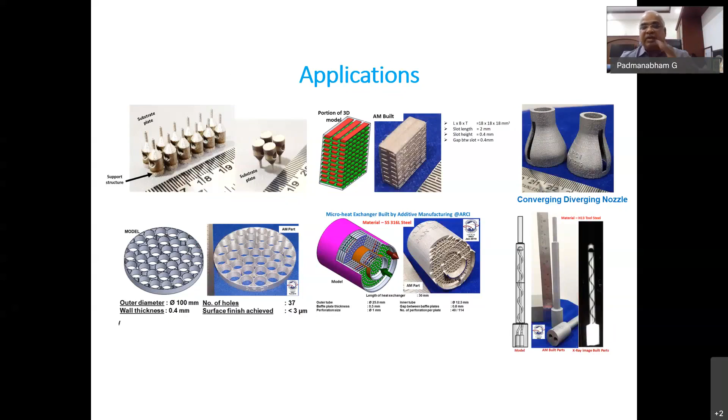Like this, there are numerous examples: a hair transplantation device, micro heat exchangers, a spacer for nuclear fuel bundles, convergent-divergent nozzles, a double-walled nozzle for certain flow applications. There are numerous applications that we have done in the lab.

We also have a lot of interaction with industry, and many come to us for training, which we provide. This was one of the pictures from training our own SLM partner's customer, who came and got trained in our lab. Even Cyient, formerly Infotech, sent two teams for training. So we are also sharing knowledge.

To summarize: each material has unique behavior under AM processing conditions and requires process optimization to obtain defect-free builds. We have to tackle the anisotropy of properties. It generally offers fine microstructures which are beneficial in terms of mechanical behavior. There is variability of properties among materials processed by different techniques, and AM processed materials behave differently compared to conventionally processed materials, as it is a highly non-equilibrium process. A great deal of research needs to be carried out to increase understanding so that a wider range of materials are available, further increasing the potential of this technology.

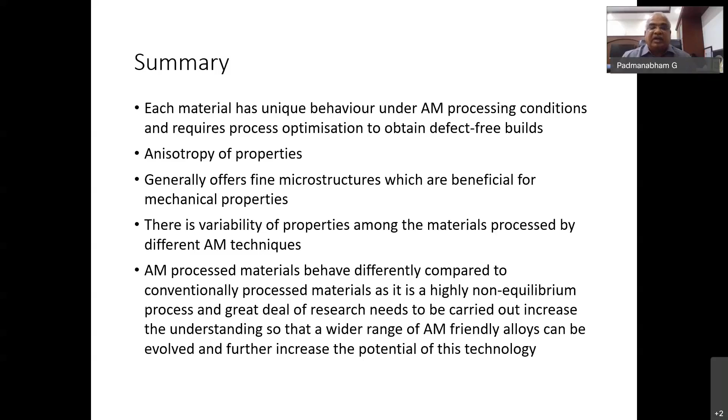And then the recent trends in terms of technology include recent increased productivity using multiple lasers, hybrid manufacturing that I mentioned, and quality, in situ monitoring and quality assurance. Then open materials models, software to predict, correct, and manage print parts, and automated solutions for post-processing and part cleaning. These are all the technology-oriented trends in which work can be done from the process technology point of view.

So in the interest of time, I think I will close it with metals. I will only make a couple of remarks about the other materials.

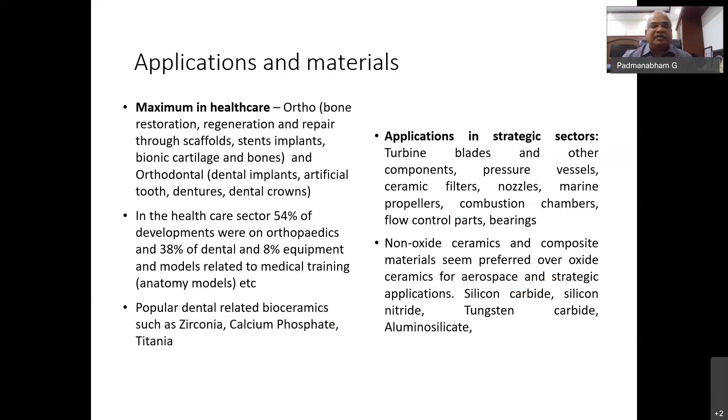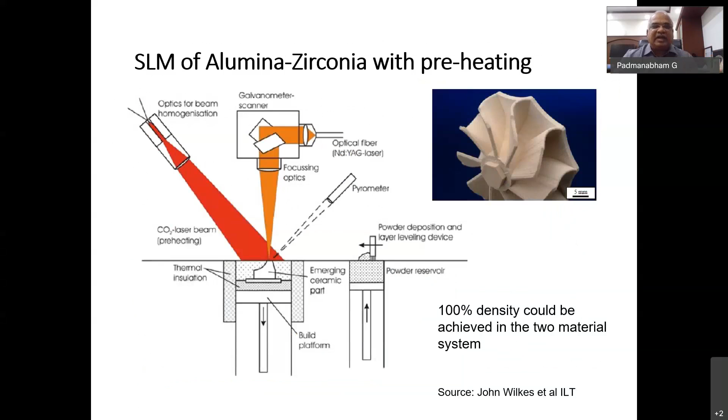And then various techniques are available now, lithography-based ceramic manufacturing. Basically, you have a ceramic suspension in a photopolymerizable binder, and with a UV laser, you do the shaping. Similarly, we have SLM itself with preheating so that melting can be done. Then we have the selective laser curing method, where we start with a binder and silicon carbide particles put together, pyrolyzed after 3D printing. And then the porosity that you end up with is infiltrated with silicon, and then you get a good part. Similarly, silicon carbide is a very technologically important material.

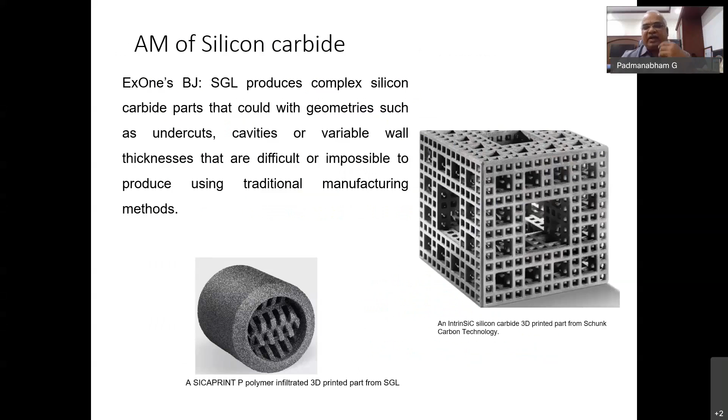One of our innovations has been 3D forming of spinel ceramics by gelation, thermal gelation techniques. You make the paste using methyl cellulose, then 3D print, then thermal gelation, and get the green samples, followed by sintering. Then you get the density you're looking for, and you can see comparable properties to slip casting samples. We can also do pressureless sintering.

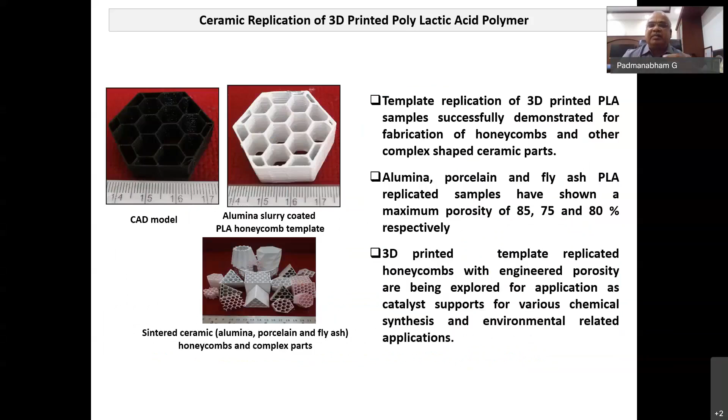Even ceramic replication of 3D printed PLA polymers is another approach. And then functional materials are also additively manufacturable.

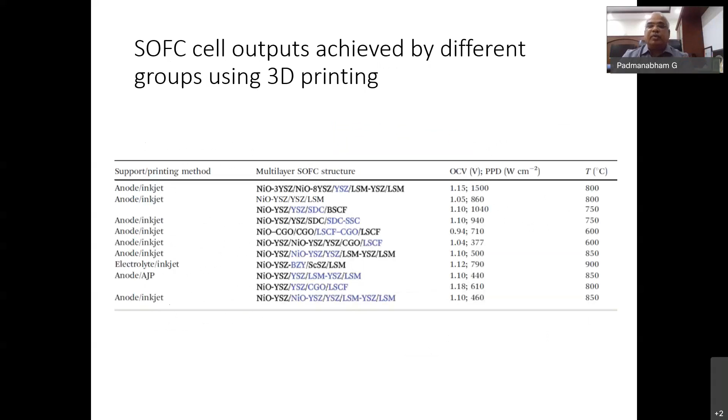I'll give an example. What is a solid oxide fuel cell? It's an anode supported or electrolyte supported electrolytic cell, basically a ceramic material. On one side you have nickel stabilized zirconia, yttrium stabilized zirconia, and on another side you have lanthanum strontium manganate. This is 3D printable using these three different materials, and there is enough literature available showing comparable open circuit voltage achievable using 3D printing of solid oxide fuel cells.

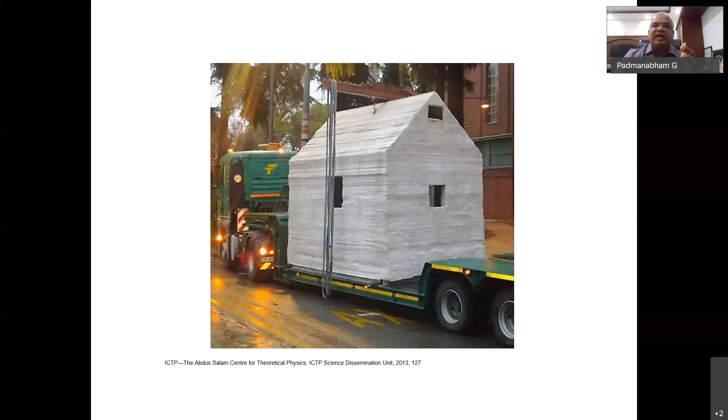And for that matter, there are also experiments using material from the moon to 3D print, using lunar soil simulated material by geopolymerization method, to 3D print such structures so that whenever we go to the moon, we can do 3D printing of livable spaces. This is only a dream. I just wanted to close with it.

Any advanced technology passes through something called Gartner's hype curve, starting from some innovation trigger. Immediately everybody thinks it has great potential, and then there will be a peak of inflated expectations. It goes to the peak, and as we realize the challenges, slowly there will be a trough of disillusionment. Some of the players who are able to understand the technology better continue to work on it, slowly solving one problem after the other, going up the slope of enlightenment, and then reaching a plateau of productivity. This is a classic trend that we see in any modern technology development.

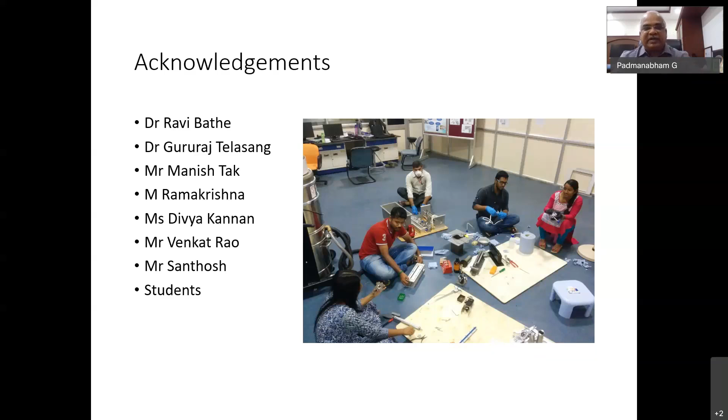Okay, so I would like to end here. This is all my team of people working on additive manufacturing, very hardworking scientists and students. You can see the kind of hard work they put in, sitting and cleaning each part of the machine before changing from one material to another. That's the scene here. So I thank all my colleagues, Ravi Bathe, Gururaj, Manish, Ramakrishna, Divya, Venkat Rao, Santhosh, and many other students who have been working on this AM technology. It is their work that I have presented. I would like to acknowledge all of them and thank you all for your attention.